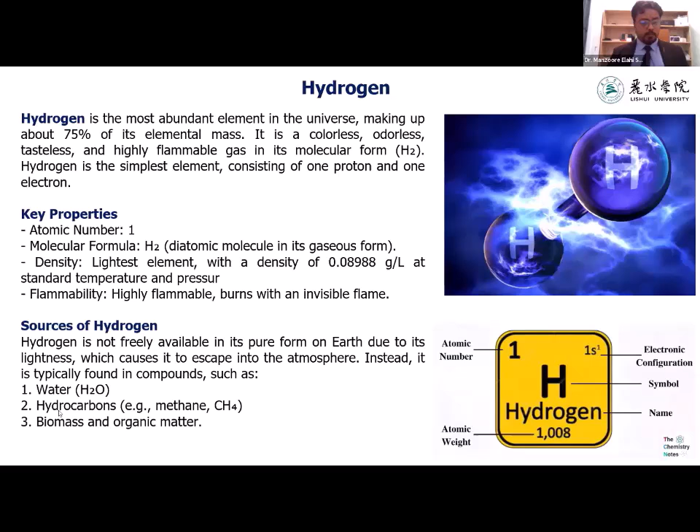It has the highest calorific value, which is very suitable for an engine. The sources of hydrogen energy are water; hydrogen can be generated from water, hydrocarbons, biomass, and organic matter.

And hydrogen in internal combustion engine. So basically we use gasoline, diesel, biofuel, etc. There is research going on since 1966 on hydrogen in internal combustion engines, since hydrogen is very cheap, has the highest calorific value, and generates negligible emissions. Hydrogen has recently gained prominence as a transitional technology towards cleaner energy. Hydrogen internal combustion engines utilize hydrogen as a fuel source while leveraging existing internal combustion engine technology, with modification to accommodate the unique properties of hydrogen.

So what are the advantages of hydrogen in engines? As I told you, it generates zero emissions, zero carbon emissions, and hydrogen can be produced from diverse sources, including water electrolysis using renewable energy. Also on the performance basis, hydrogen has a high energy to weight ratio, enabling efficient energy utilization in transportation and industrial applications. You can see a photo of a BMW car, an old car that was manufactured in 2007.

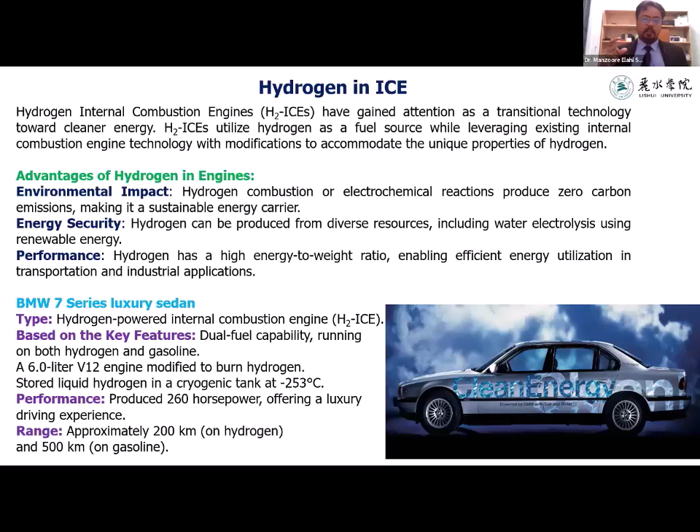So now further research is going on in BMW to produce more hydrogen energy run engines. This hydrogen energy powered internal combustion engine runs on a dual fuel engine, and it has a 6-liter V12 modified to burn hydrogen. In terms of performance, it produces 260 horsepower, and the range is about 200 kilometers on one fuel cell. Now let's look at the key features of hydrogen in IC engines.

Again, these are some of the advantages: high combustion efficiency, since hydrogen's wide flammability range, like 4 to 75% in air, and high flame speed enhance combustion efficiency. And yes, it has clean emissions, zero carbon dioxide, carbon monoxide, or sulfur dioxide. However, there is an increase in NOx emissions, which can be controlled by utilization of an exhaust gas recirculation unit, and this will avoid unnecessary parts.

So there are, in the engine, little modifications needed to fit hydrogen inside the internal combustion engine. And hydrogen has a high energy to weight ratio, making it advantageous for applications where weight is a concern. Now let's talk about hydrogen storage and delivery.

Hydrogen is stored either way - this is very important. There is ongoing research on hydrogen storage and hydrogen generation. This is a very trending topic, so hydrogen storage and delivery is something you can write a review article or research on.

So hydrogen is stored in either compressed gas form at 350 to 700 bar, or as liquid hydrogen at minus 253 degrees centigrade. Fuel delivery systems in hydrogen internal combustion engines require materials that resist hydrogen embrittlement and ensure safe transport to the combustion chamber.

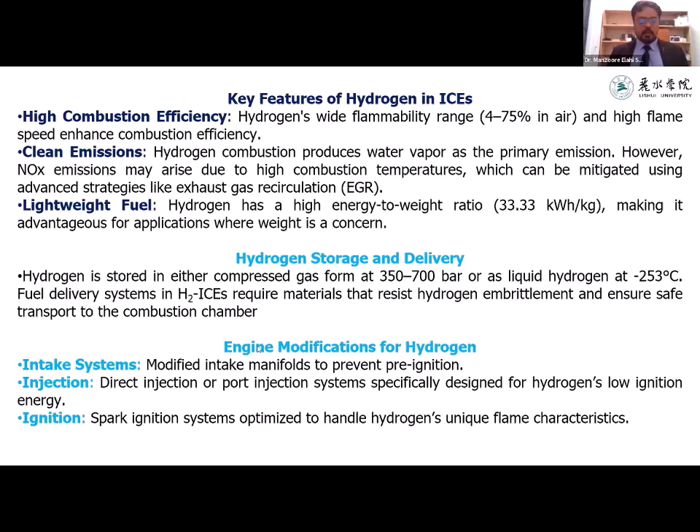Now let's come to this one - wide range of flammability. Hydrogen has a wide flammability range in comparison with all other fuels. As a result, hydrogen can be combusted in an internal combustion engine over a wide range of fuel-air mixtures. A significant advantage of this is that hydrogen can run on a lean mixture. When we use biodiesel, for example, in an internal combustion engine, it doesn't have a lean mixture - to make it a lean mixture we mix a little biodiesel with more diesel. So there is no such problem in the hydrogen run engine, since it is a lean mixture it can ignite very rapidly and randomly.

A lean mixture is one in which the amount of fuel is less than the theoretical, stoichiometric, or chemically ideal amount needed for combustion with a given amount of air. Generally speaking, fuel economy is greater and the combustion reaction is more complete when a vehicle is run on a lean mixture. Additionally, the final combustion temperature is generally lower, reducing the amount of pollutants emitted in the exhaust manifold.

So you can see some of the challenges of using hydrogen in the internal combustion engine. As I told you previously, it reduces all the emissions - carbon dioxide, carbon monoxide, particulate matters, etc. But there is a rise of nitrogen oxide. Why? Because when more oxygen is supplied, there are more nitrogen dioxide emissions. So there is a solution, like using exhaust gas recirculation and lean burn combustion strategies.

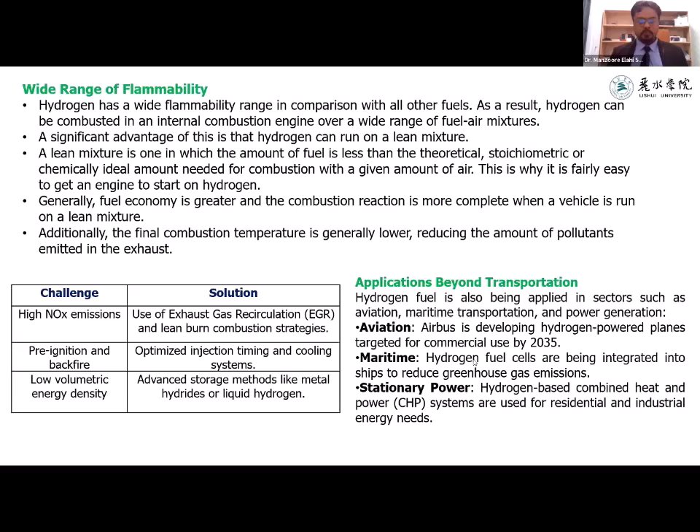And these are some examples of hydrogen run vehicles. This was the first ever hydrogen built engine, known as the GM General Motors Electrovan, manufactured in 1966. This is a hydrogen fuel cell vehicle. The General Motors Electrovan was powered by a fuel cell which used hydrogen and oxygen to produce electricity. It has a range of approximately 150 miles on a single charge of hydrogen, and there are zero emissions. But the challenge is the bulkiness of the vehicle, because storing the hydrogen requires space, and high cost and lack of hydrogen infrastructure made it impractical for mass production.

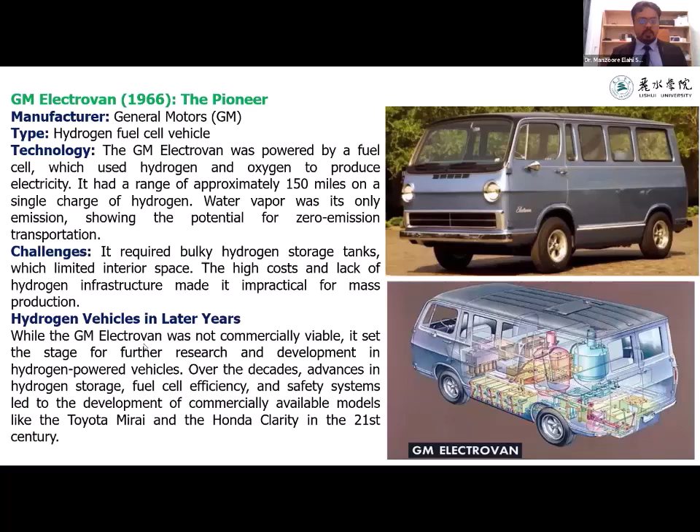So it was dropped. However, recent research on hydrogen vehicles has developed several different hydrogen vehicles, like Toyota Mirai and Honda running on hydrogen. And these are some of the other recent examples of hydrogen vehicles.

So this is the main hydrogen fuel cell in the engine. Through the fuel cells, hydrogen can be used as the fuel for the internal combustion, like hydrogen fuel. A fuel cell system converts hydrogen into electricity via electrochemical reactions to power electric motors. This approach is efficient and emission-free, offering advantages over conventional internal combustion engines.

So the fuel cell technology, this is the recent one. Proton exchange membrane fuel cells are widely used due to their quick startup and high efficiency. And the energy efficiency of this - fuel cells achieve 60 to 70% efficiency, significantly higher than the 30 to 40% achieved by internal combustion engines run on diesel.

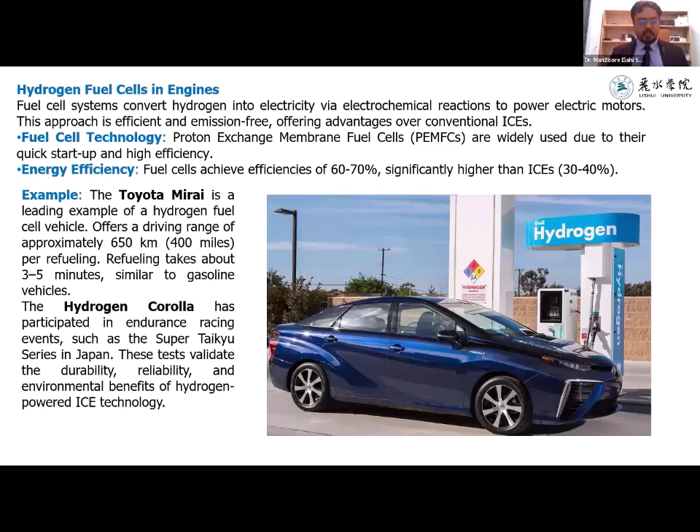This is the recent example, Toyota Mirai. One fuel cell can offer a range of 650 kilometers, and refueling takes only about 3 to 5 minutes. So just refuel the hydrogen for 3 to 5 minutes and run for 650 kilometers at a stretch. And hydrogen energy is very cheap to manufacture and produce, and also green - no carbon emissions and good for the environment. This is one example, and this is another example, the hydrogen Corolla.

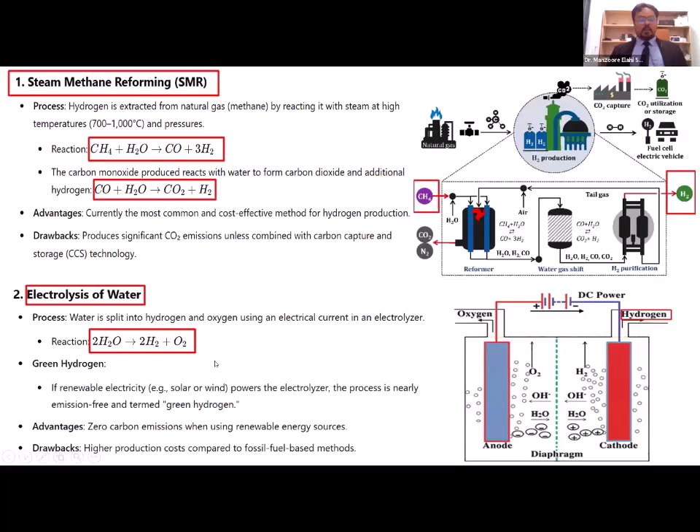Another process for manufacturing hydrogen is biomass gasification. In this process, organic materials such as biomass are heated in the presence of limited oxygen to produce a gas mixture known as syngas, containing hydrogen, carbon monoxide, and methane. The hydrogen is separated from the syngas through further processing. You can see here the reactor. Since we have very little time to cover all the topics, I won't be covering this in detail.

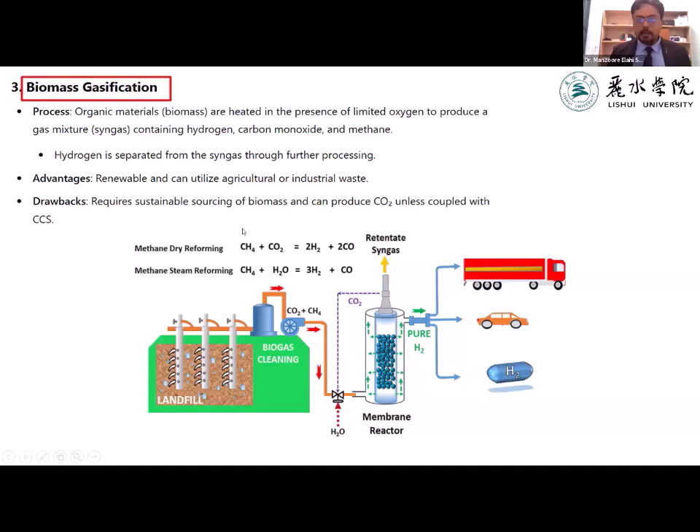One more method is the solar thermochemical hydrogen production process. These are metal oxides in a container, heated by the sun, and it dissociates into the metal oxide and the oxygen atom and the hydrogen atom, and the hydrogen is separated and the oxygen is separated. So these are some of the processes to manufacture hydrogen.

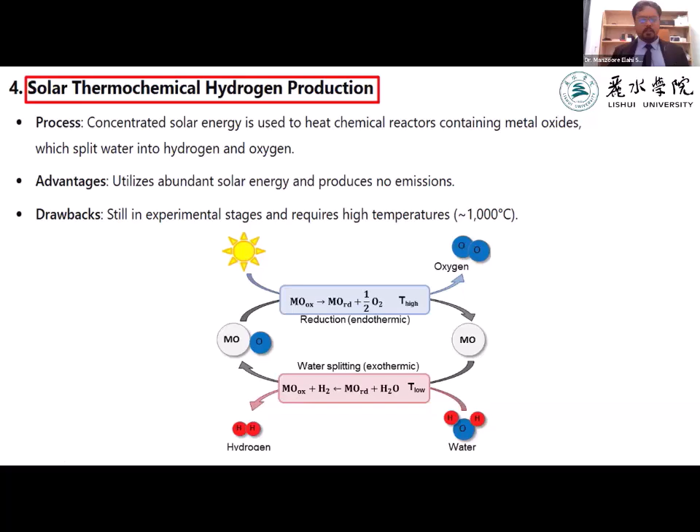Hydrogen can be used as a dual fuel. Since my research is basically on biofuel, we also published several papers on the dual fuel engine, for example producer gas, the biofuel with hydrogen. I'll just tell you in brief about this.

In the combustion process ignition, first, biofuel acts as the primary ignition source. Its cetane number ensures reliable ignition under compression. Hydrogen, being a secondary fuel, supports combustion by enhancing flame propagation and improving thermal efficiency.

The second phase is the combustion phase, which is pre-mixed combustion. The hydrogen and air mix, and the mixture ignites first due to its high flame speed and wide flammability range. First, the biofuel is injected into the system, then the hydrogen ignites the biofuel and ignites itself, and there is heat release in the engine, and the process goes on.

I'll tell you briefly about the heat release. Hydrogen's high combustion temperature leads to a faster heat release rate. Biofuels add stability to the combustion process, reducing the risk of knocking.

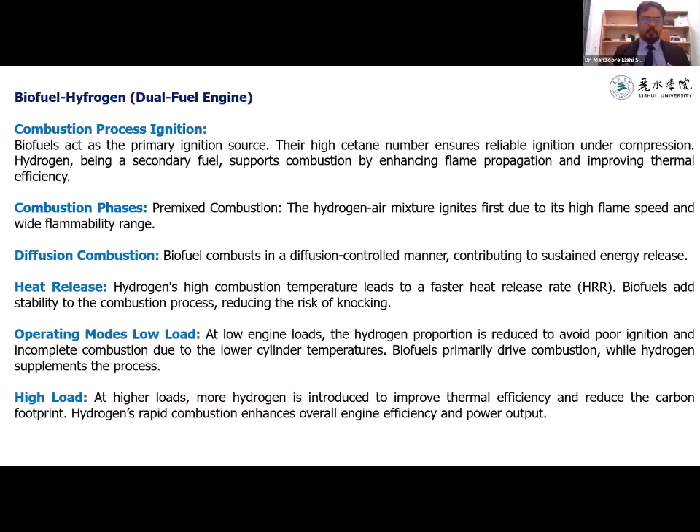Also, when the engine is at high load, more hydrogen should be supplied, because it will take more energy, and at low loads, a low hydrogen supply should be there. You have to remember this when you work on dual fuel engines in the future.

I will come to the next topic, which is one of the trending topics as well: biofuels and nano additives, a detailed study. I will explain this in very detail, and this is the scope of the research.

As you know, there is increase in pollution and increase in population. As the population increases, there is more pollution. I'll give the example of China. China was one of the most populated countries in the world. Now India has overtaken China in population, but the geographic area of China is 3 times bigger than India.

When I go out in China, I can breathe clean air, because they utilize batteries, and there is no pollution at all, no pollution.

But in India, there are no such regulations on pollution, so the government should implement pollution regulations by using more of the greener fuels such as hydrogen or biofuels, or battery operated cars, EV, electric vehicles, etc.

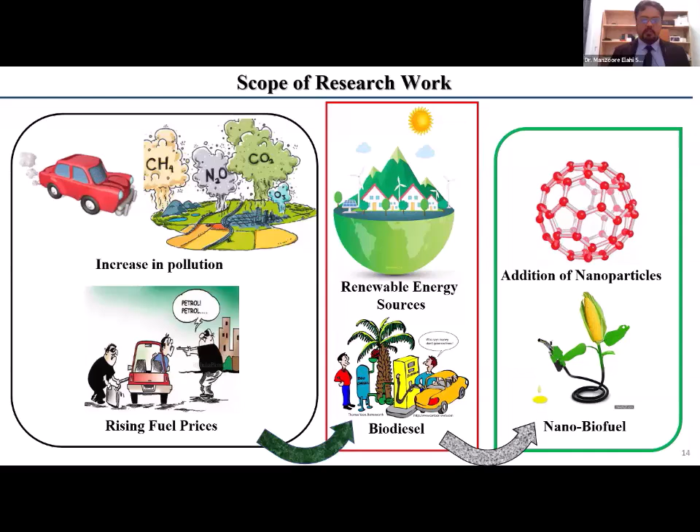Biodiesel is a renewable, biodegradable fuel made from natural oils or fats such as vegetable oils and animal fats. India is covered by forests, and several trees produce several seeds. These seeds can be collected, and oil can be extracted through the seeds and used as biofuel. For example, in South India, Pongamia pinnata, honge, or jatropha, or many other trees, and animal fats, for example chicken fat or lamb fat.

That fat, anything which has oil or free fatty acid, can be converted into biodiesel. Even recycled cooking oils - in India it's not a taboo, they use the oil again and again, but after 2 or 3 uses, you have to throw it out. So the cooking oil can also be converted into biodiesel.

It is a cleaner burning alternative to petroleum based diesel, and can be used in diesel engines with little or no modifications. Biodiesel is produced by a simple chemical reaction known as transesterification, which converts it into FAME, known as fatty acid methyl esters.

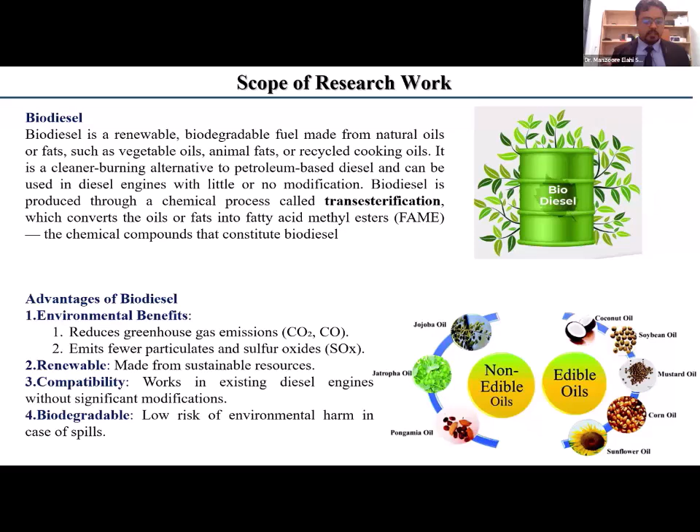Some advantages of biodiesel are environmental benefits - it reduces greenhouse gas emissions, emits fewer particulate matters and sulfur dioxide. It is renewable, made from sustainable sources such as vegetable oil and animal fats - no synthetic things are used here. And compatibility - it can work with existing diesel engines without any significant modification.

These are the applications of nanoparticles in biofuels. It improves combustion efficiency, acts as a catalyst to accelerate combustion reactions. It ensures complete fuel combustion, reducing unburnt hydrocarbons, and reduces the ignition delay - that is the main thing.

Also emission reduction - it lowers nitrogen oxide emissions, carbon monoxide, and particulate matter emissions by promoting efficient combustion, and enhances soot oxidation, minimizing particulate emissions. It also has a higher calorific value.

Some antioxidant properties of nanoparticles such as cerium oxide extend the biofuel shelf life. When you keep the biofuel for a certain time, it starts to agglomerate - the compound starts to settle down. So it can increase the shelf life as well.

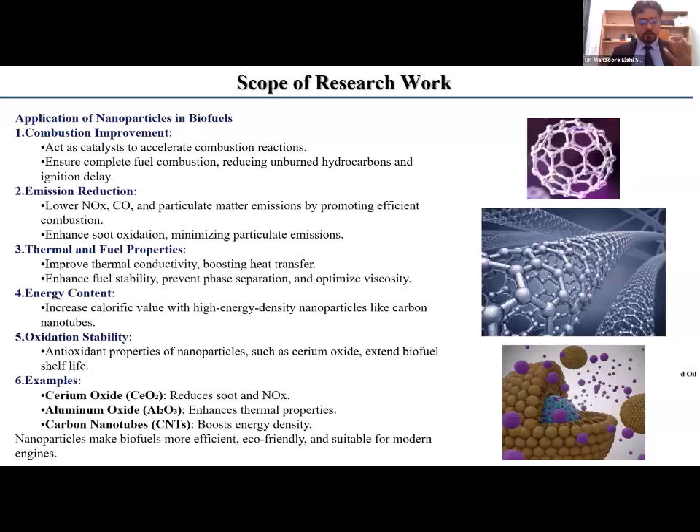Some examples of nanoparticles are cerium oxide, aluminum oxide, and carbon nanotubes. Recent advancements, since I did my research in Malaysia, there is a new nanoparticle that is trending known as MXene. No one has done research on this, so if you're interested, you can use those as well.

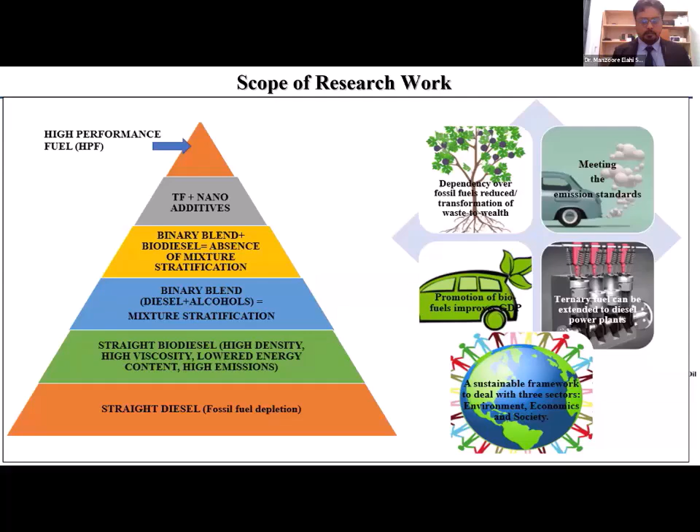So we combine the biofuel, the diesel, and the nanoparticles to make a high performance fuel. And this is the research aim of using biofuels.

The use of diesel and biodiesel fuel blends in engine application results in large quantity of noxious emissions, because diesel and biodiesel don't burn properly. Sometimes biodiesel, since it has low calorific value and high viscosity, doesn't burn properly. So to improve the calorific value and reduce the poor cold flow properties,

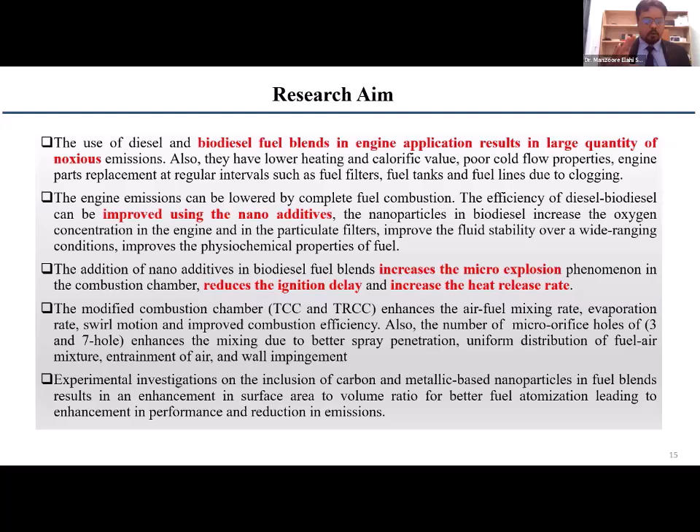there is a need of adding some additive - it may be a liquid additive or a nano additive. Nano additive can be used in very small parts, ppm or milligrams per liter, like 40 milligrams per liter or 60 milligrams per liter or 100. It will be very negligible in 1 liter of a B20 fuel blend.

So the addition of nano additives in biodiesel fuel increases the micro explosion process. It reduces the ignition delay, increases heat release rate.

In the research we did, we modified the combustion chamber - toroidal combustion chamber and toroidal re-entrant combustion chamber. Also, instead of 3-hole micro orifices in the fuel injector, we used 6-hole or 7-hole injectors for better mixing, better spray penetration, and uniform distribution of fuel-air mixture.

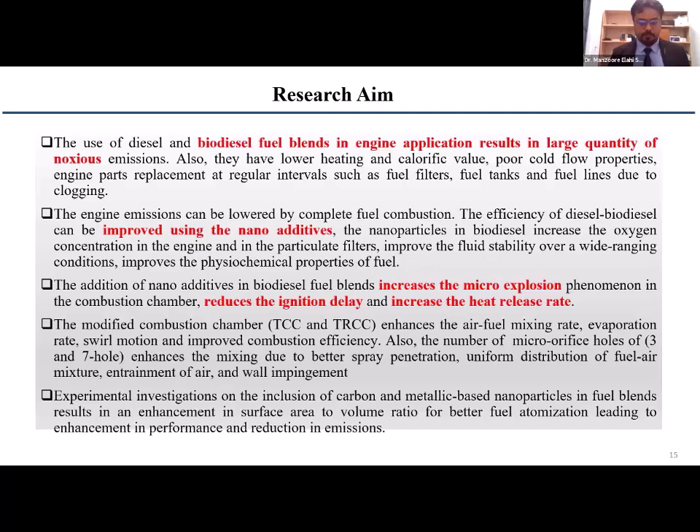So I'll continue with this one. The objective of our study is to produce biodiesel from different biodiesel feedstocks and check their feasibility as an alternative fuel source in four-stroke diesel engines.

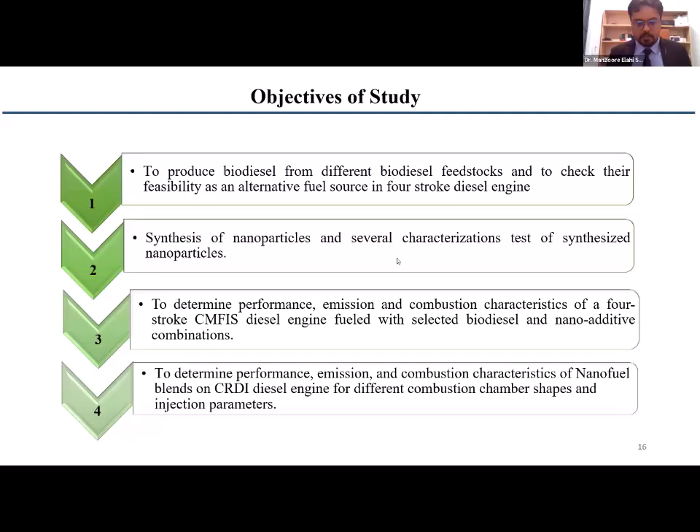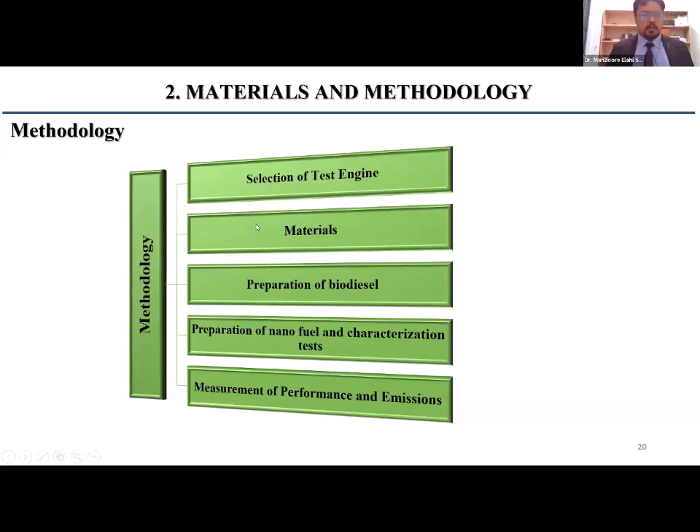I'll go to the next slide now. The methodology is very important, starting with selection of a test engine. We selected a CRDI engine and a normal diesel engine.

The materials used are graphene oxide nanoparticles, aluminum oxide nanoparticles, and zinc oxide nanoparticles, and the surfactant used is sodium dodecyl sulfate.

We prepared dairy scum methyl ester, honge oil methyl ester, and cottonseed oil methyl ester. I'll tell you in detail in the upcoming slides.

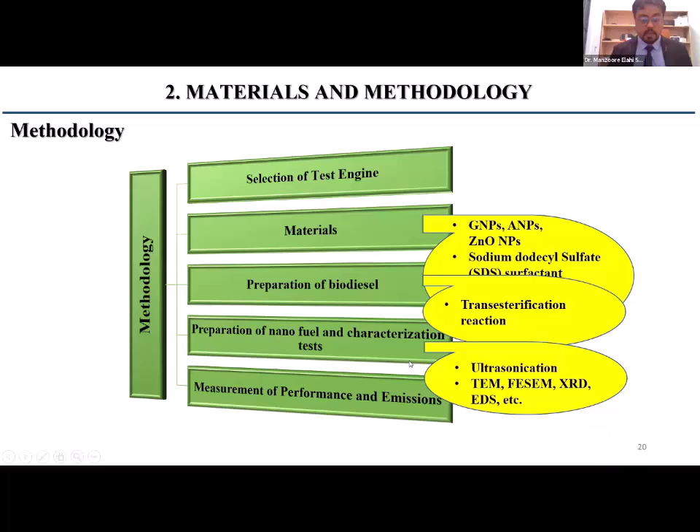Preparation of biodiesel is done with a very simple reaction known as transesterification, followed by preparation of nanofuels and characterization tests such as ultrasonication, TEM, FESEM, XRD, EDS, etc., and finally measurement of performance and emission characteristics.

These are the synthesis methods of nanoparticles. As I told you, there are commercially available nanoparticles like Sigma Aldrich, but we prepared them in the lab. This is the synthesis of graphene oxide nanoparticles by the chemical vapor deposition method.

This is a CVD chamber—you can see here, this is the CVD chamber, and here is a copper substrate.

So here they will settle on this copper substrate, the graphene oxide, at a temperature of around 1200 degrees, and there is a steady gas rotating around the copper substrate. When we remove the copper substrate and the deposition, we powder it in a ball mill to get finely powdered nanoparticles of graphene oxide.

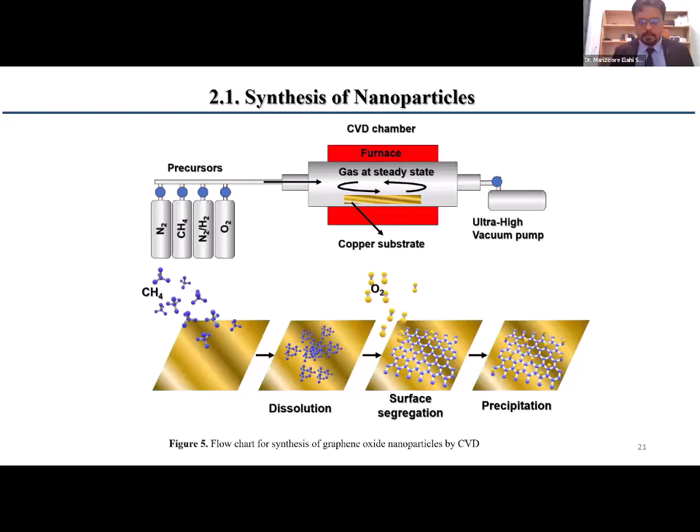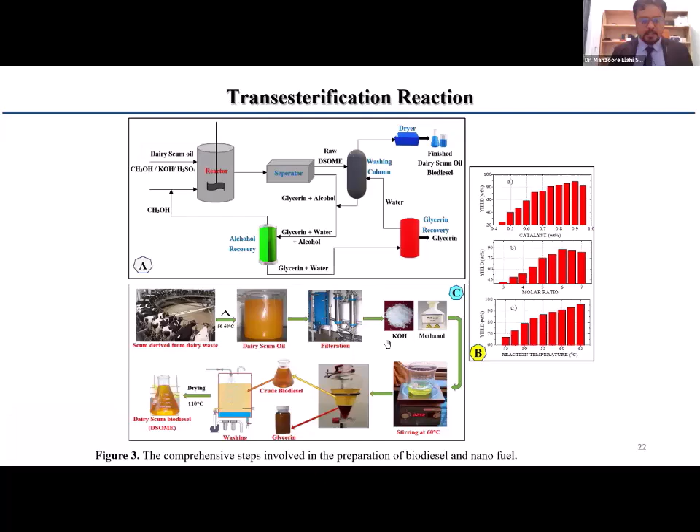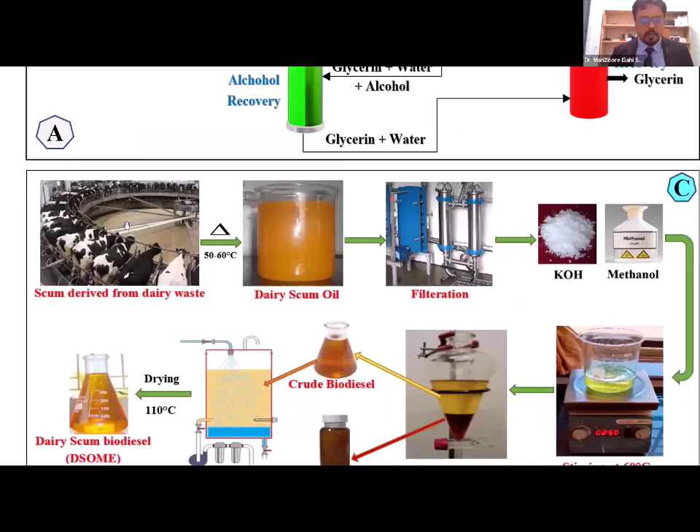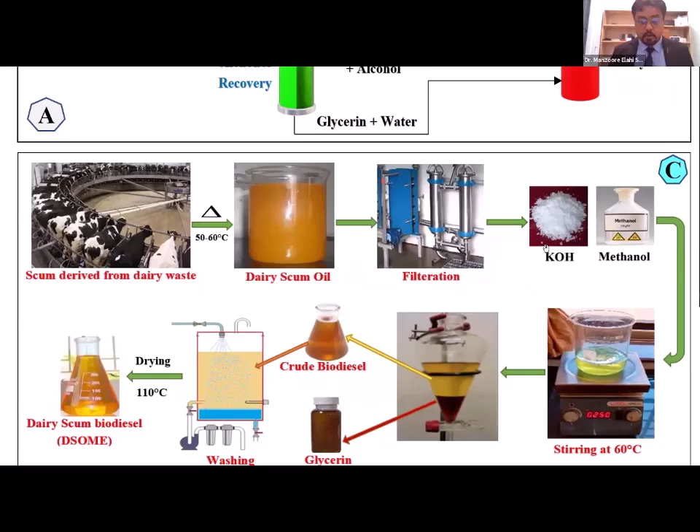And this is the trans-esterification reaction of the dairy scum. The dairy scum - dairies produce a lot of milk waste which contains free fatty acids. So we take the scum coming out of the factory, filter it, and convert it into biodiesel by adding KOH, potassium hydroxide, and methanol, and it will be stirred. There is a trans-esterification reaction. I will explain in the upcoming slide.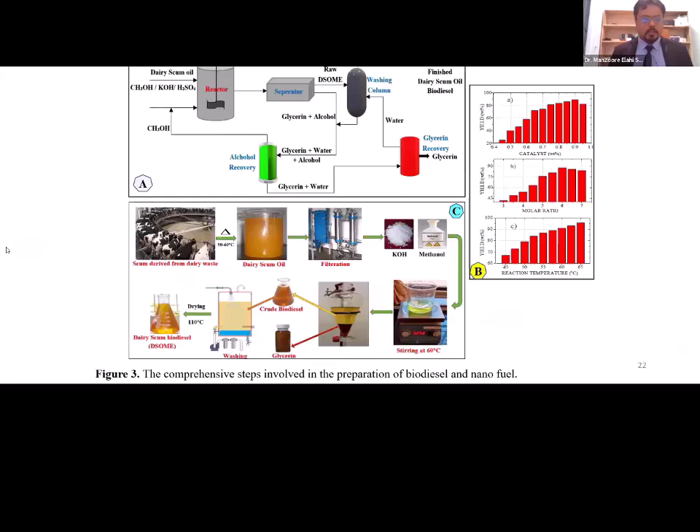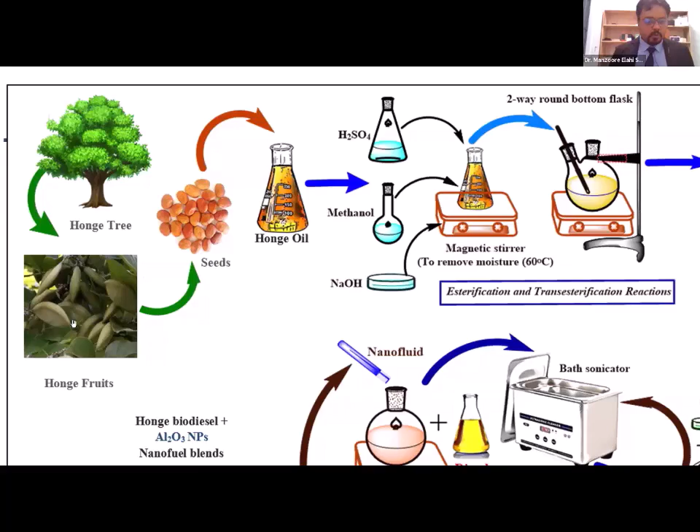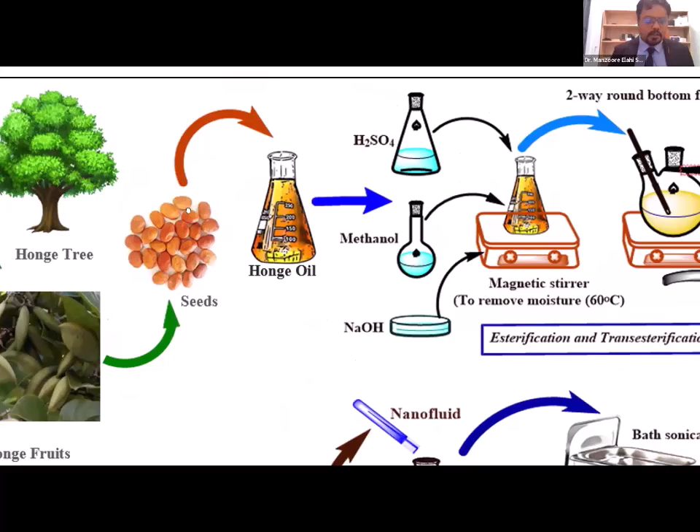Here in South India, this tree is known as the honge tree, scientific name Pongamia pinnata. You could have seen this type of fruit hanging on the tree. It contains seeds which have a very high oil content, so it is ground and the oil is derived. This is known as honge oil - in Kannada, they say honge oil.

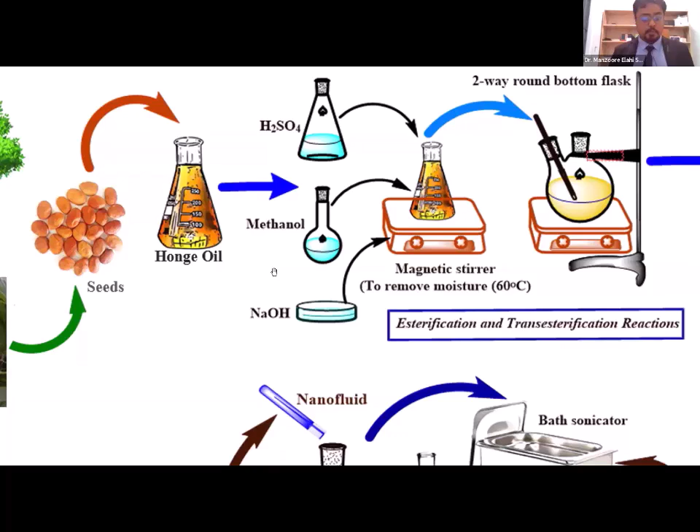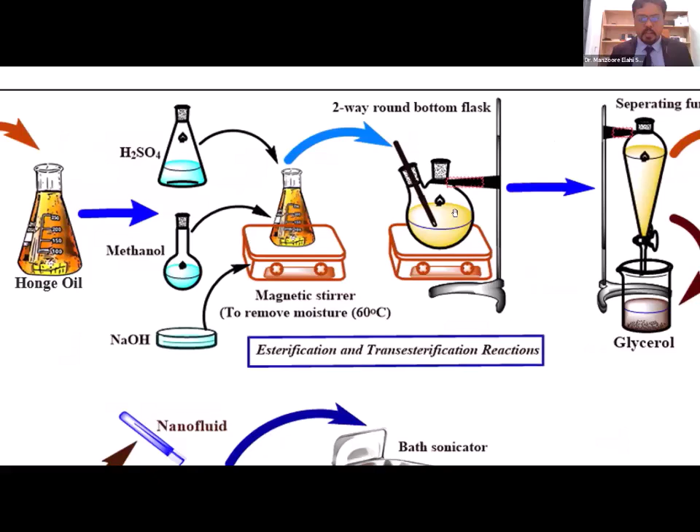The honge oil is dried here using a magnetic stirrer to remove the moisture at 60 degrees centigrade. The water molecules will vanish from the honge oil derived from the honge tree. For the trans-esterification reaction, we use sulfuric acid, methanol, and NaOH, and heat it in a two-way round bottom flask, where the actual trans-esterification reaction happens for 60 minutes. It is a very simple reaction.

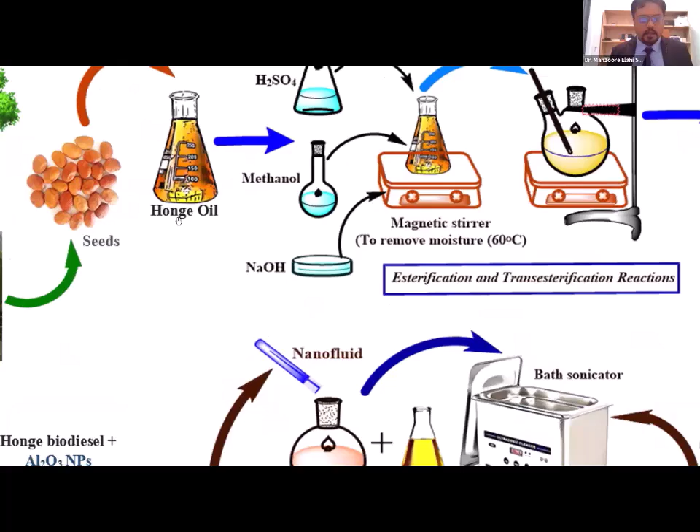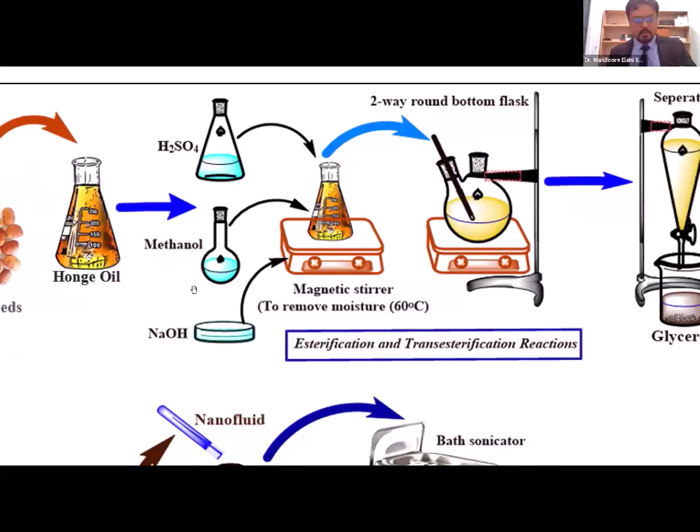You can see the honge oil is derived, or naturally, in the market you can also get honge oil, jatropha oil, or sunflower oil - you can explore biodiesel from any oil which has free fatty acid content. The simple process is sulfuric acid, methanol, and NaOH, heated for 60 minutes in a two-way round bottom flask. And in the separating funnel, the top layer will always be the oil.

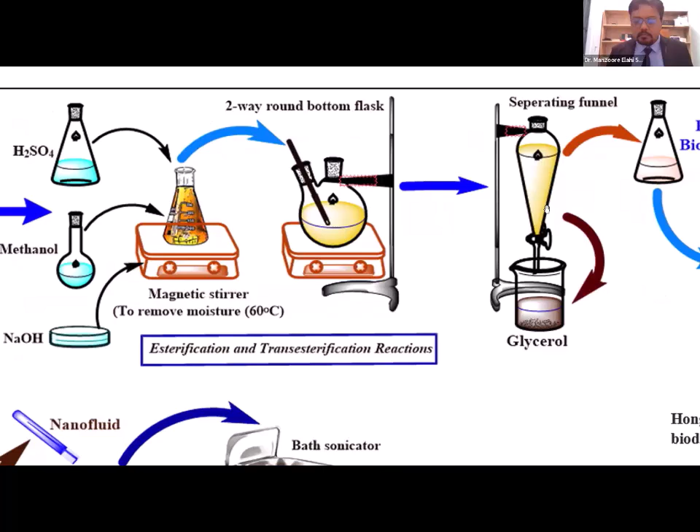When you put oil on water, you can see something floating - that is nothing but the oil. The heavier thing will settle at the bottom; this is the glycerol. Glycerol is a byproduct that can be used for soap manufacturing, etc.

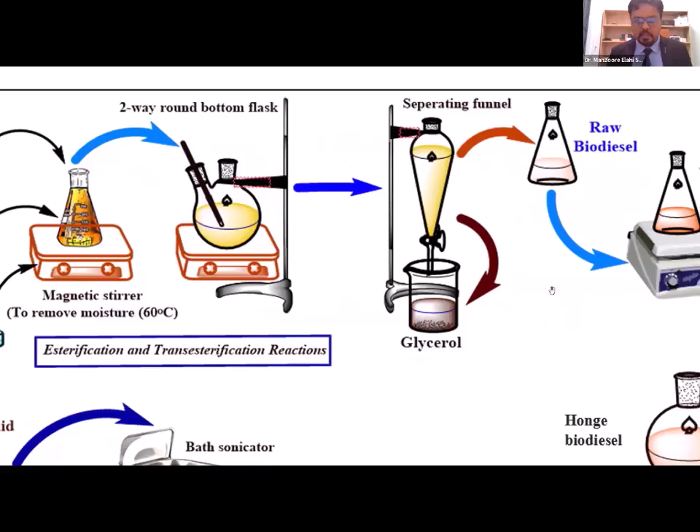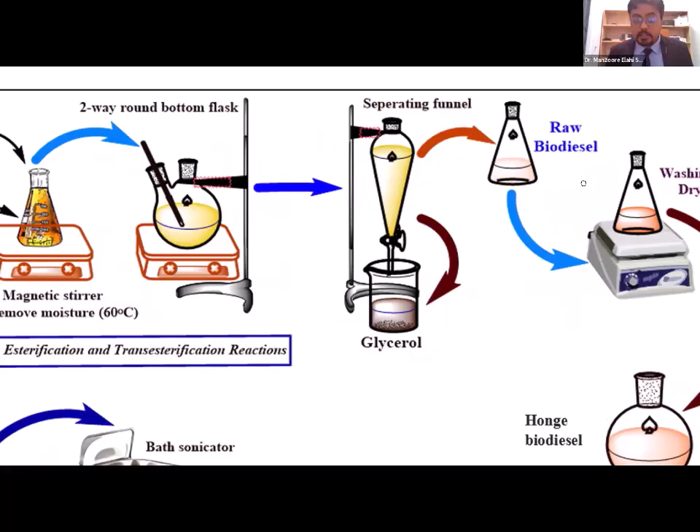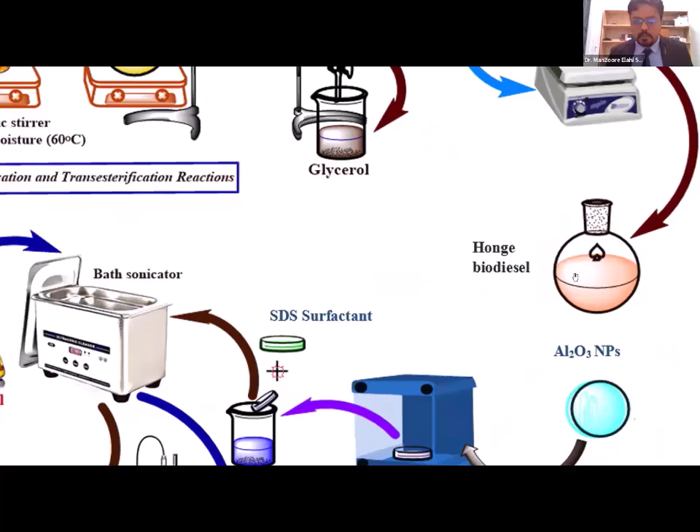And here the oil which is taken is known as the raw biodiesel. The raw biodiesel is washed and dried, and it produces pure honge biodiesel. This is a very simple reaction - it will just take one day to produce the biodiesel.

Our research also involves preparing nano fuel. For this example, we have taken aluminum oxide nanoparticles and weigh, for example, 20 ppm or 20 milligrams per liter, 40 and 60 - three different quantities of aluminum oxide - and mix with diethyl ether, or you can just take normal distilled water, and this is the SDS surfactant.

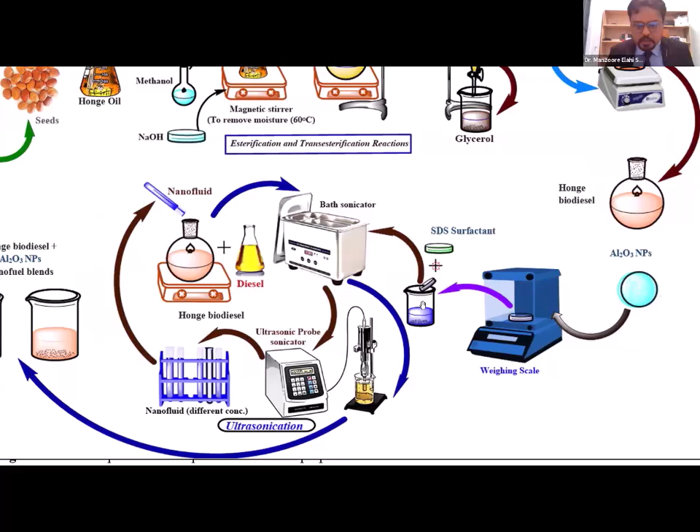As I told you in the previous slide, the SDS surfactant's application is to avoid the agglomeration or settling of the nanoparticles in the fuel blend. So here we send this mixture - containing the aluminum oxide, diethyl ether, and SDS surfactant - to a bath sonicator. We sonicate this for about 60 minutes. This sonication is required for proper blending of these three things: SDS, diethyl ether, and aluminum oxide.

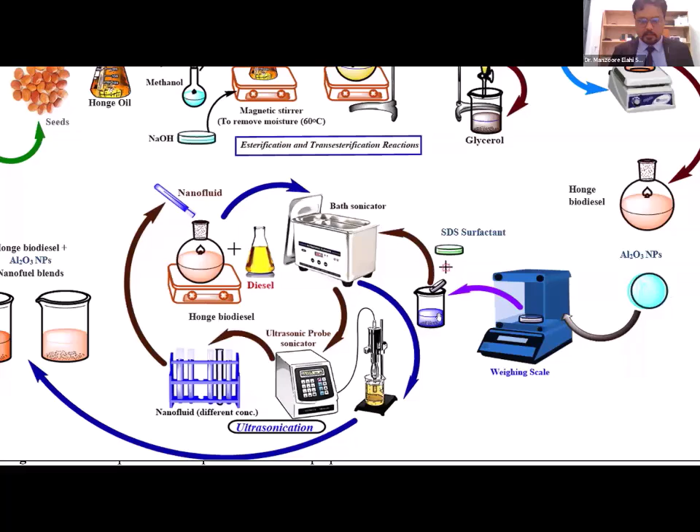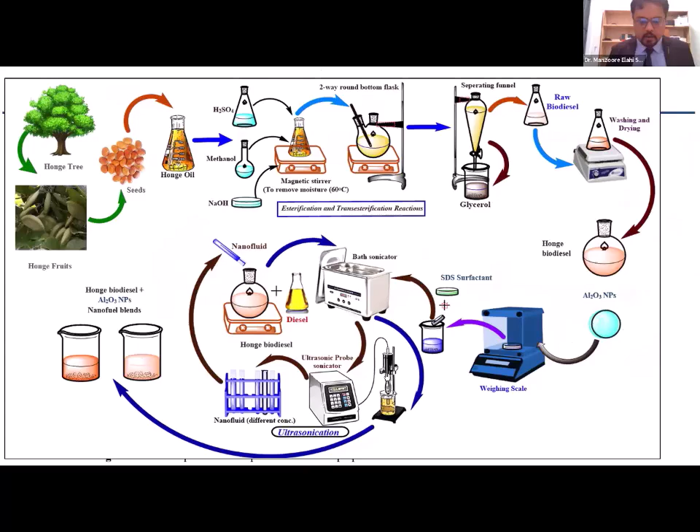And from here we send it to probe sonication for further blending, and simultaneously we prepare the biofuel - B20, biofuel B40, biofuel B25, biofuel B5.

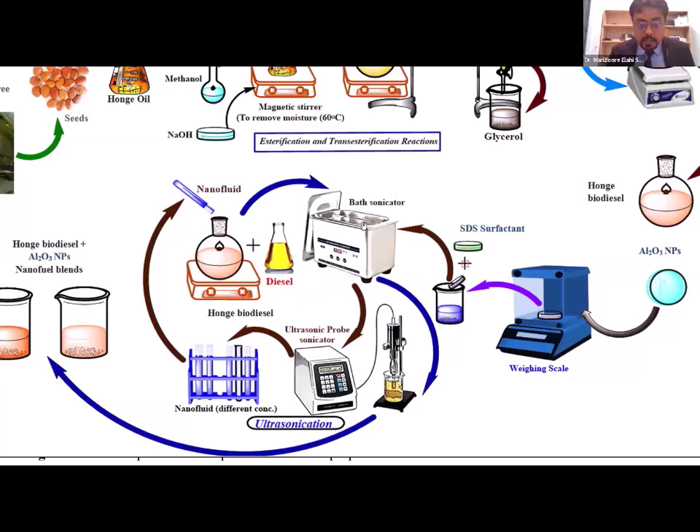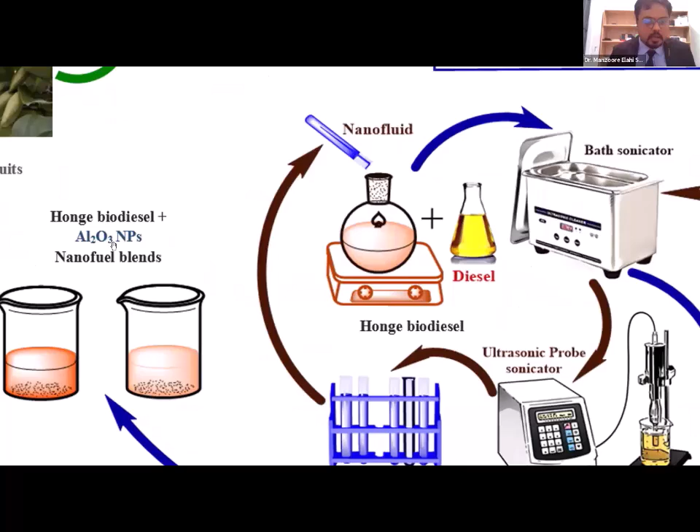For example, biofuel B20 - we consider B20 is nothing but 20% biofuel and 80% diesel. So we take B20, 20% and 80%, in a flask, and put in the nanofluid which we generated, and again bath sonicate, and again send to probe sonicator. That produces the nano fuel of honge biodiesel and aluminum oxide nanoparticles.

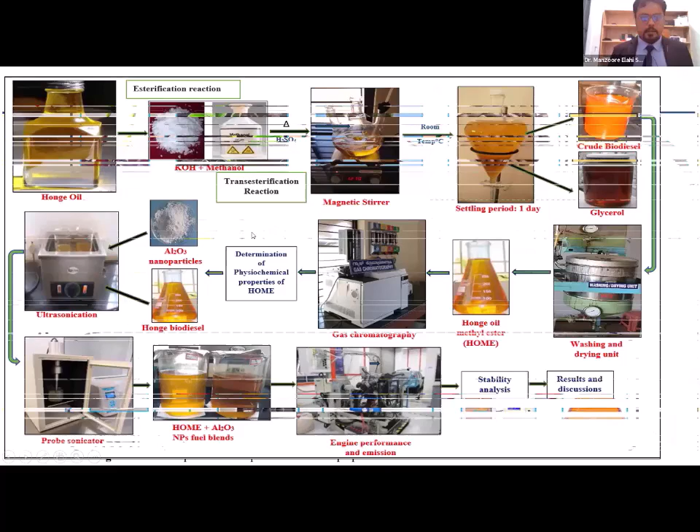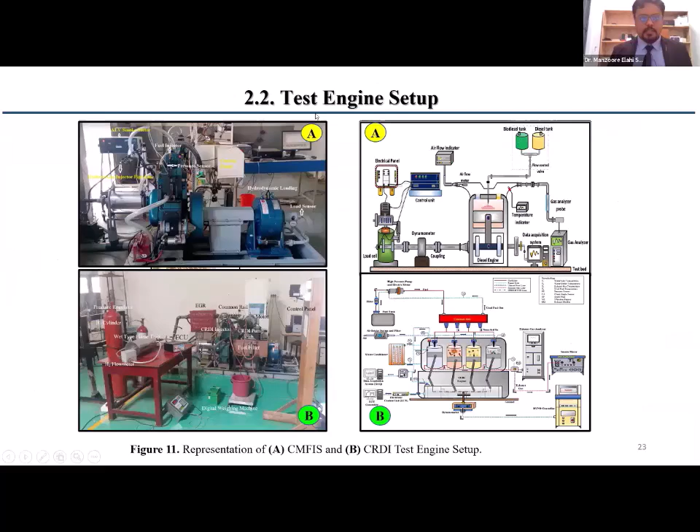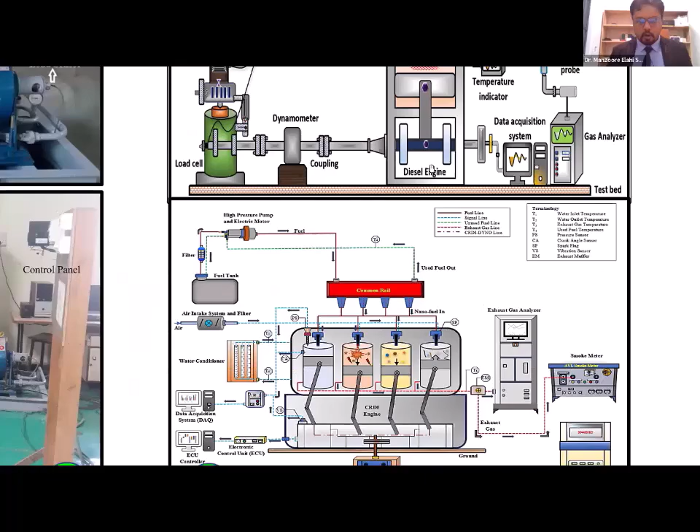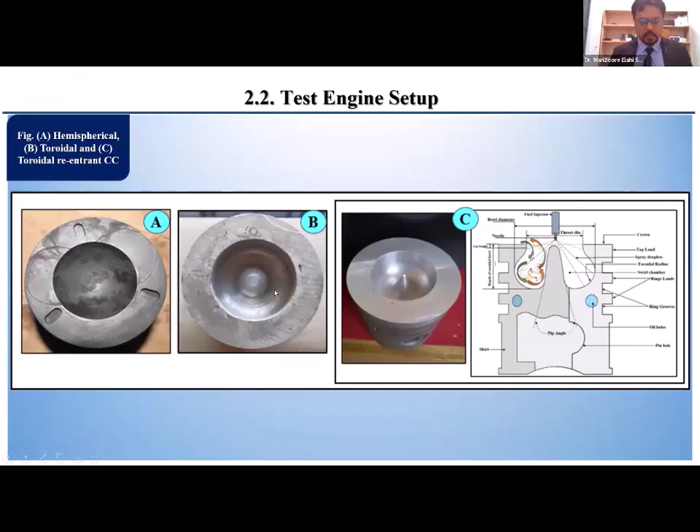This is the test engine setup. Here is the CMFIS conventional normal diesel engine, and we also used the common rail direct injection system, CRDI system. We also modified the combustion chamber, using hemispherical, toroidal, and toroidal re-entrant combustion chambers. The single hole fuel injector can be changed to 3 hole, 6 hole, and 7 hole injector.

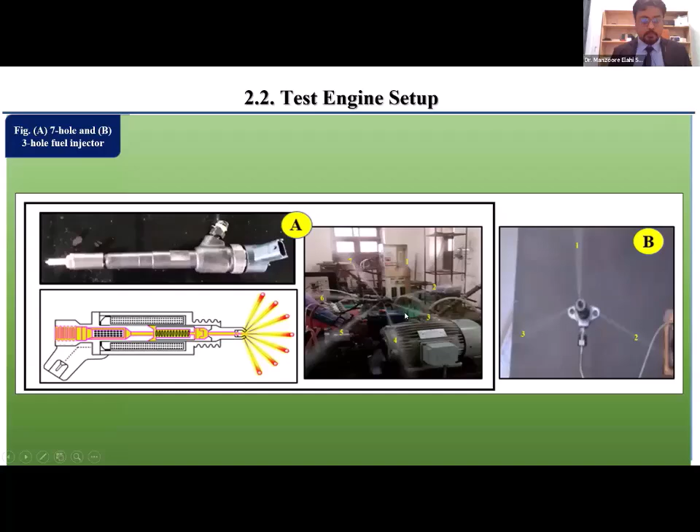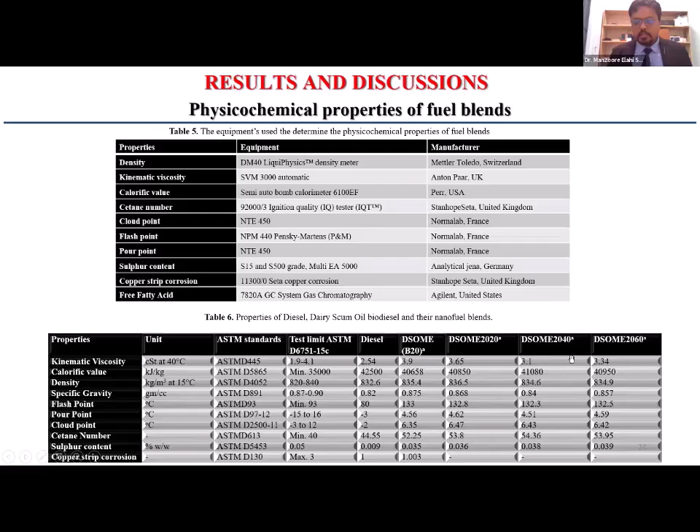For example, we used DSOME, that is dairy scum oil methyl ester. 20 is the quantity, so this is biodiesel B20, with 40 ppm of the nanoparticle. This one gave the best results. We also studied the same thing for cottonseed.

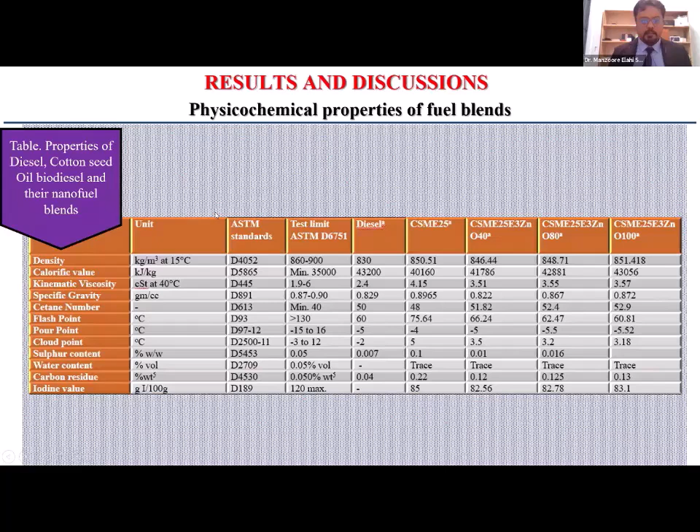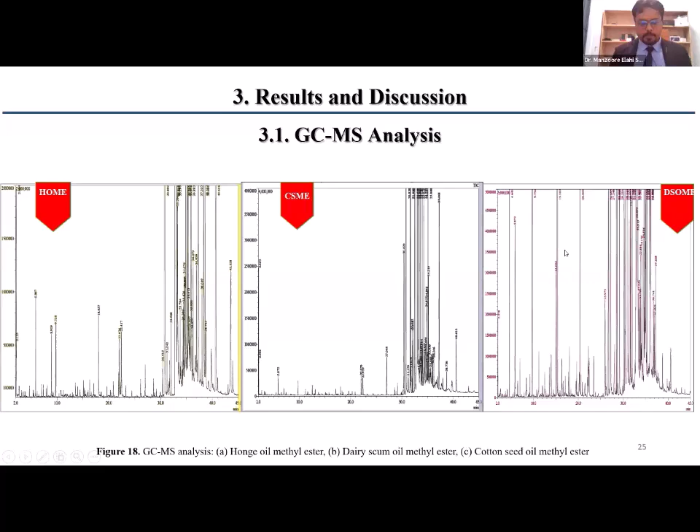These are the gas chromatography and mass spectroscopy analyses. Since we prepared the biodiesel, we didn't know what it contains, what type of fatty acids or compounds. So we needed to make sure it contains the right quantity of compounds. I'll just show you here.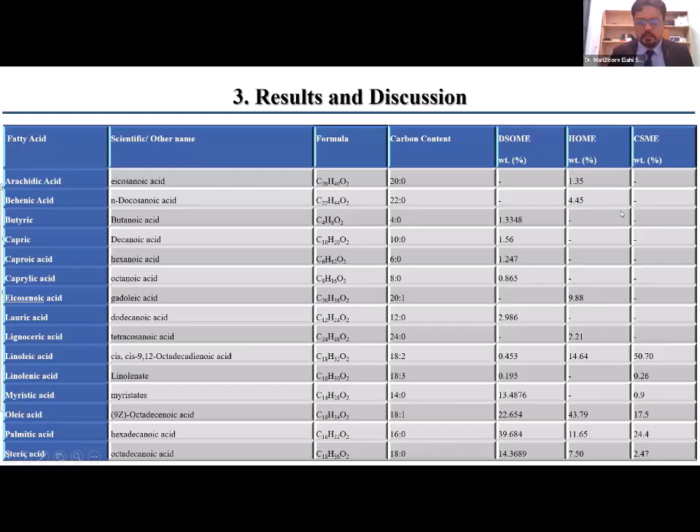Here you can see the fatty acids for DSOME, this is Honge oil methyl ester, and this is cottonseed oil methyl ester. These are some of the compounds, and by the grace of God, the biodiesel we manufactured had all these properties matching standard biofuel.

These are the characterization of graphene oxide nanoparticles. You can see this is the SEM analysis, and this is the TEM analysis. These are the XRD. Since we manufactured it in the lab, we also needed to make sure it was properly synthesized.

In the XRD you can see the 001 peak, and these are the normal peaks for graphene oxide. We compared it with a standard JCPDS card, and this is the EDS analysis of the graphene oxide nanoparticles, showing the elemental composition, how much carbon and how much oxygen it contains. Graphene oxide is made up of the compound of carbon and oxygen.

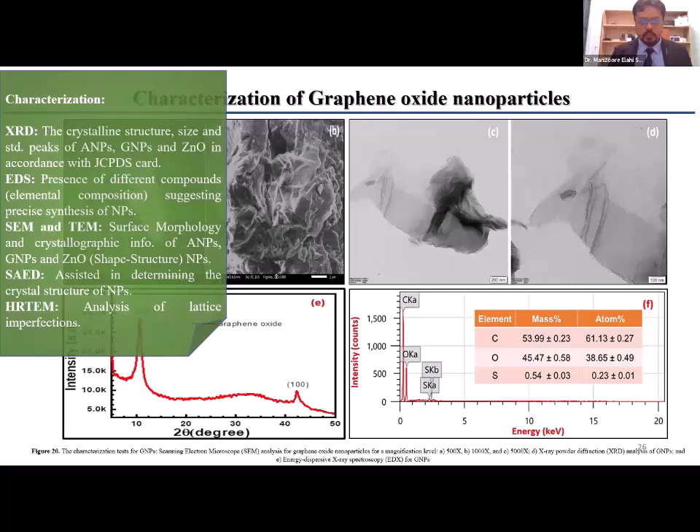And also this is the aluminum oxide nanoparticles. We did the same characterization for the aluminum oxide nanoparticles as well.

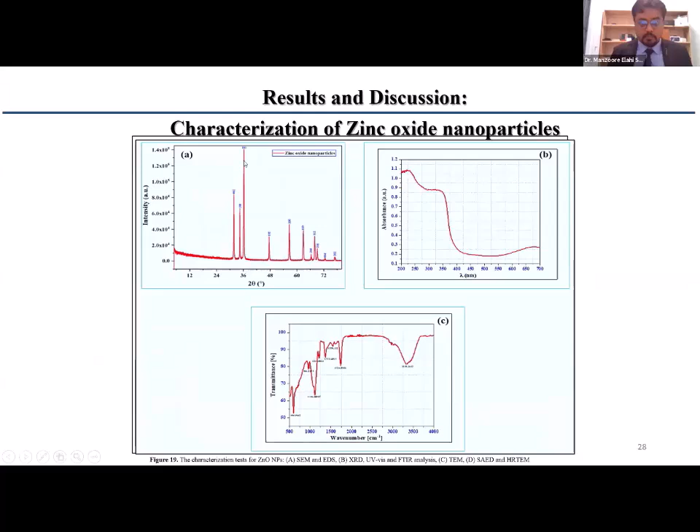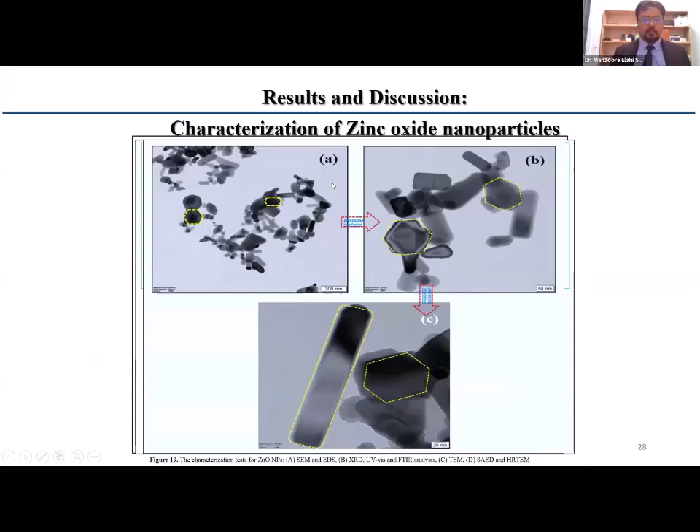These are the characterization of zinc oxide nanoparticles, here are some of the EDS images. This is the XRD, this is the UV-Vis, this is the FTIR analysis, and these are some of the TEM images. The TEM analysis was done at IISc Bangalore. Also this is the SAED pattern, and this is the HRTEM image.

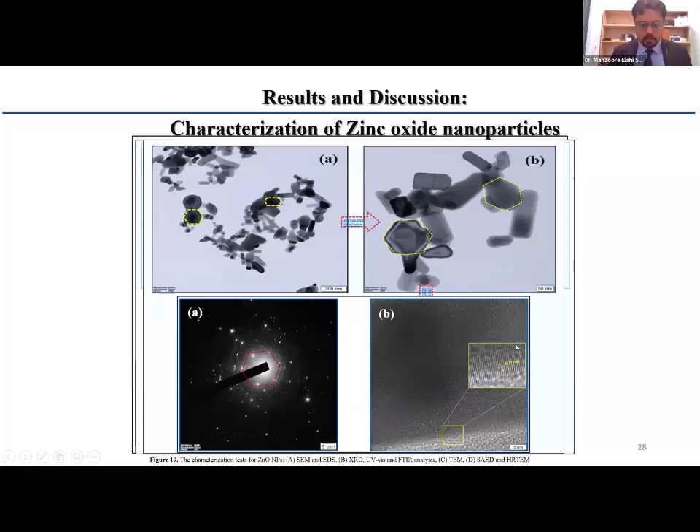These are the performance characterization of Honge with aluminum oxide nanoparticles, and DSOME with graphene oxide. Since we have very little time remaining, maybe around 9 minutes, I'll just skip this part.

So compared to that, I'll just briefly explain about these graphs. When you include nanoparticles in the biofuel, for 40 ppm, 60 ppm, or 20 ppm, it is way better than using biofuel directly in the engine. Properties such as calorific value, flash point, density, and many others like micro explosion, surface area to volume ratio of the nanoparticles mixed with biofuel are better than pure biofuel. So we wanted to compare here.

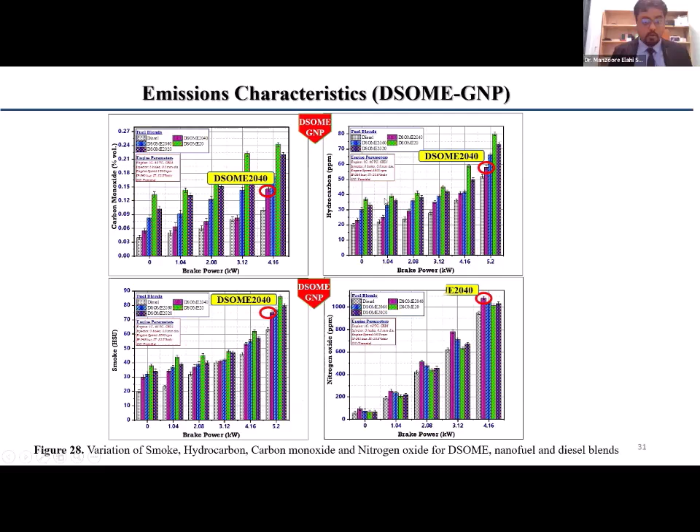We compared the biofuel with the nanofuel here. So here you can see the carbon monoxide emissions, hydrocarbon, smoke, nitrogen oxide, and the same thing for different nanofuels. These are the combustion duration, ignition delay, and peak pressure, which are the combustion characteristics of the diesel engine when you use the nanofuel.

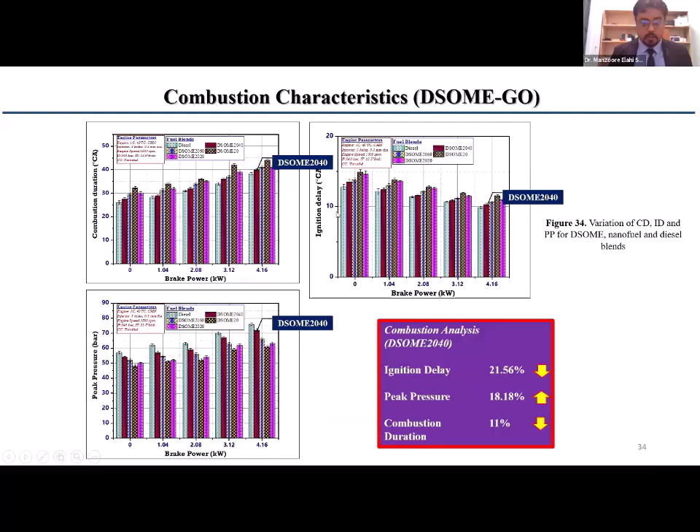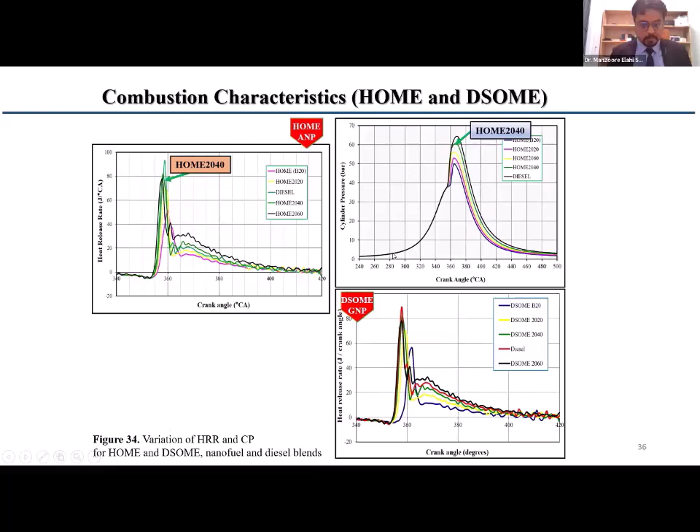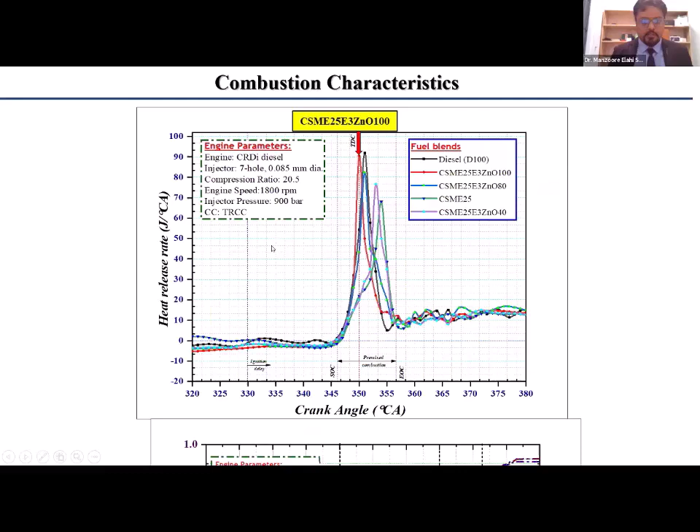And here the same thing. These are the heat release rate, cylinder pressure, and the exhaust gas temperature, ignition delay, and peak pressure, and heat release rate here, cumulative heat release rate, and in cylinder pressure.

So these are some of the results showing that utilization of these nanoparticles plus the biofuel in the diesel engine improves the overall performance and reduces the emission from the diesel engine.

And also there is a further scope. If you want to study in the same field, there is further scope by using artificial intelligence, okay, such as optimization. You can take the results from some researcher, he will be very happy to share the results with you. So you can optimize, and several things are there. You can use some algorithms such as dragonfly algorithm, nature-based algorithms, wolf algorithm, so many are there. You can name your own algorithm by yourself and share it.

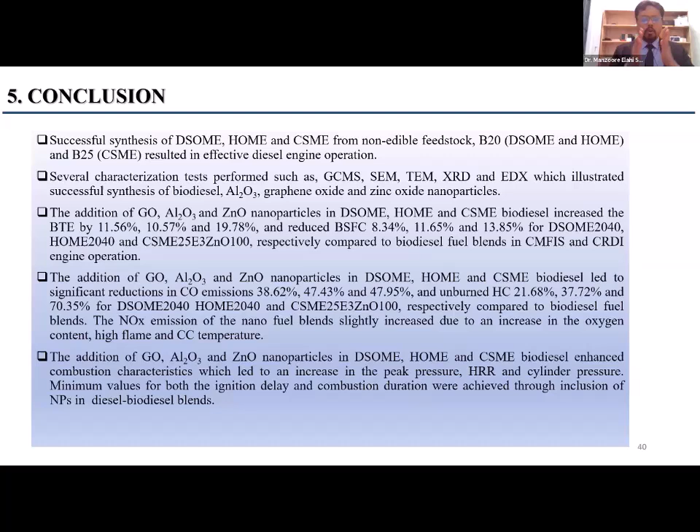So there is further scope of study on this. Just you need a lot of readings to study this topic. So this is very important for the research scholar who wants to publish.

So these are the things which I told about the hydrogen, and the basic about hydrogen energy, and a detailed thing about the biofuels, research in the biofuels. So the main thing is to convert your idea to publications. So I'll just tell in detail about this one.

So it contains like master research writing basics, and we'll go through this from research to publication and essential writing tips. So how to write a scientific research paper. Okay, so let's make scientific writing engaging and effective.

What is research? The creation of new knowledge and the use of existing knowledge in a new and creative way, so as to generate new concepts, methodologies, and understanding.

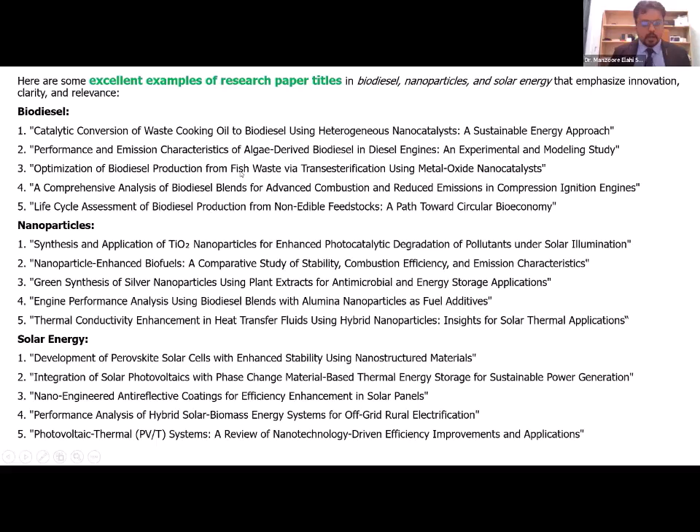So this type of titles you should use in the research article. And also we'll come to the abstract, your paper's elevator pitch.

The abstract should be around 150 to 250 words, not like most people who put everything in the abstract or nothing in it. It should highlight the objective, and everything about the paper should come in the abstract - the objectives, the methods used, the results, and the conclusions. There are no figures, tables, or citations in the abstract. There is a separate thing known as a graphical abstract you can draw, which is a requirement of some journals but mostly optional. Remember, 150 to 250 words in the abstract.

Now we come to the introduction section. Here you provide context - why it is important, what previous researchers have done in their work, and what was lacking in their work. You can also add what you are doing in your work - you have to identify the gaps. At the end of the introduction section, you can write a statement like 'I am doing this for the first time' or something similar. You can add that at the end of the introduction.

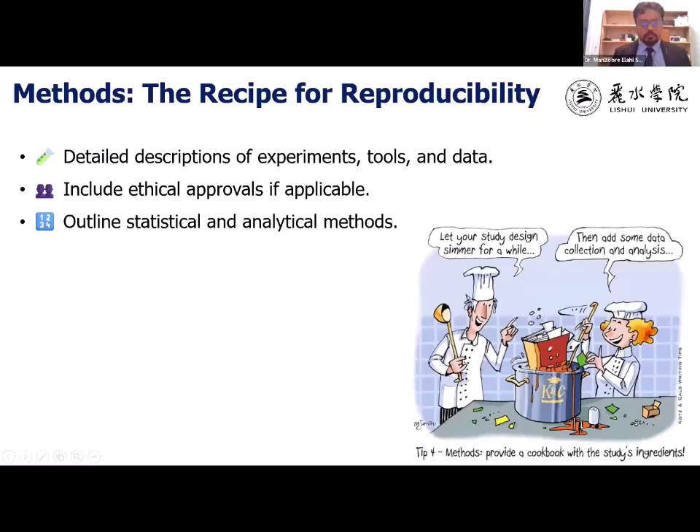And I'll come to the result and discussion. This is very important. This is the main part which a reviewer sees in the paper. So results show, don't tell.

Use tables and figures to display key findings. You have to use very attractive figures, not plain black and white ones. The figures you use should attract the audience and tell everything about your research, increasing the aesthetic appeal of your paper while attracting readers. Present facts without interpretation, organize findings logically, and use clarity.

Okay, and this is the conclusion part. The conclusion is very important. What is the conclusion? Whatever you had done, same as the abstract, from introduction till the discussion and results, everything can be included in the abstract. But in the conclusion, what you have done in the result and discussion, you have to discuss what you have concluded, what is your result, what is your output. You have to add and discuss it in the conclusion.

So first, relate findings to the existing literature. Acknowledge limitations of your field and your study, suggest next steps, and summarize the key implications without overreach.

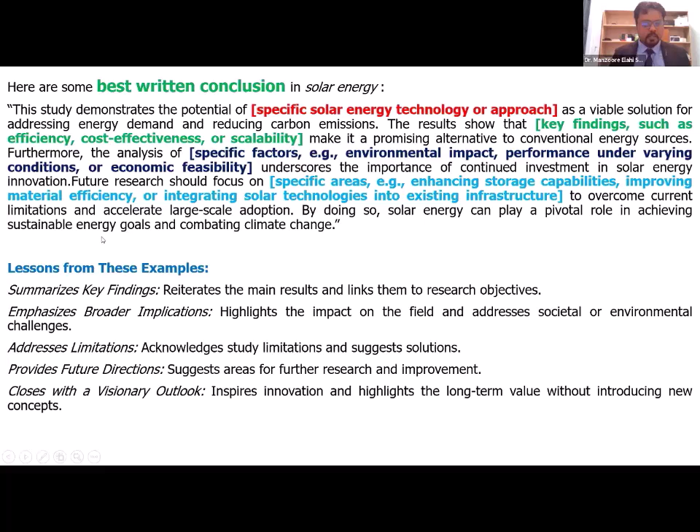So the lessons from these examples: it summarizes key findings, emphasizes the broader implications of the research, addresses the limitations, provides future directions, and closes with a visionary outlook. By doing so, solar energy can play a pivotal role in achieving sustainable energy goals and combating climate change.

This is very important, as I told you in the previous slides - tables and figures, visual excellence. You can use very beautiful tables. For example, if you want to draw a table for methods related to chemical reactions, there is software known as ChemDraw. And instead of using Excel, PowerPoint, or Word for drawing graphs, you can use Origin.

You have to avoid duplicating information in the text and visuals. Some people, for example, in papers which I review, just cut and copy the same image or TEM image from someone else's work into their own. Sometimes the reviewers will find out, most of the time they won't, but in the future the article might be retracted from the journal. That is a very big thing - you have to be very careful about retraction as well.

And this is the reference, giving credit. Different journals have different styles - for example, APA style, like the Journal of Cleaner Production. For example, IEEE uses numbered style. So different types of styles are there. If you want to write a review article with maybe 350 to 400 references, and you use manual formatting for each reference, it will take 3-4 days to change to the journal style. So just in a click, if you use EndNote, Zotero, or Mendeley software, just one click is sufficient.